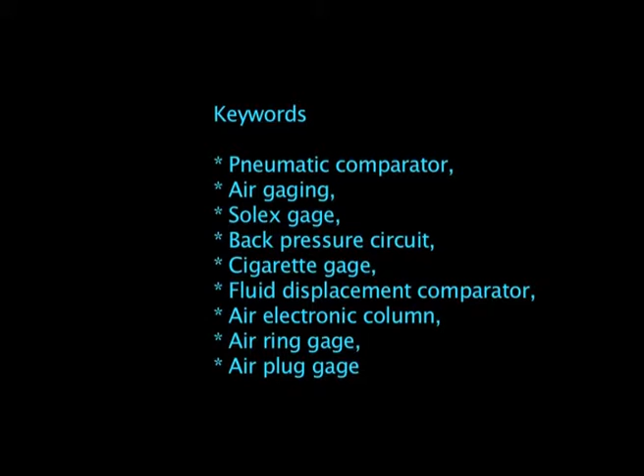In this lecture, we will be discussing pneumatic comparators, also known as air gauging equipment. We will study the need for pneumatic comparators, their working principle, the different kinds of circuits available, and the various components used in them. We will also study a commercially available gauge, the Solex gauge, and then move on to the important characteristics of pneumatic comparators. Then we will discuss their advantages and disadvantages, and finally see some applications of pneumatic comparators.

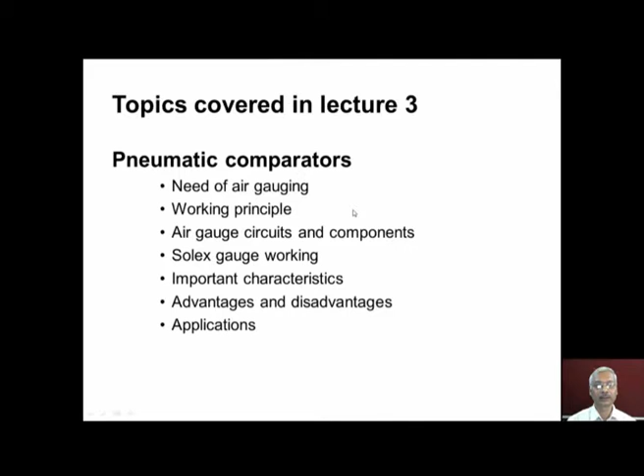Now let us study why there is a need for air gauging circuits or pneumatic comparators. Basically, they are non-contact type comparators, and because of this, they offer the advantages of improved workflow, increased productivity, and decreased downtime. They're ideal for measuring dimensions with tolerances smaller than 0.1 millimeter, and when gauging very tight tolerances, a resolution as small as 0.001 millimeter can be achieved.

Its non-contact characteristic makes air gauging particularly useful for checking very soft materials, highly polished surfaces, components with very thin walls, and other delicate materials. In case of delicate workpieces with highly polished surfaces, if we use contact type comparators, scratches may appear on the workpiece. So in such cases, non-contact type comparators are desired. Pneumatic comparators offer that particular benefit of not making any scratch on the workpiece surface.

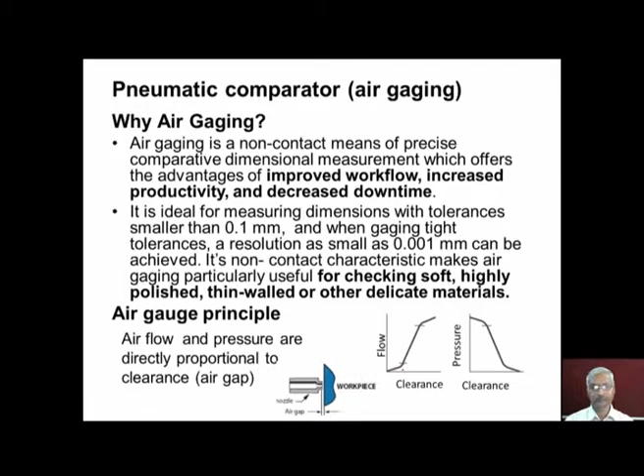Now let us study the different types of air gauging circuits available. The first one is the back pressure circuit. In this diagram, this is the workpiece, this is the nozzle, and this is the air gap or clearance between the workpiece and nozzle. We have the compressed air supply and a pressure regulator, so desired pressure can be set using this regulator, and there is a restrictor to restrict the flow of air.

When the gap between nozzle and workpiece is high, the airflow is easy. The air escapes easily into the atmosphere, and little pressure is developed in the system. Now, when this particular size increases, meaning the air gap reduces, the escapement of air is restricted, so a back pressure is developed in the circuit, which is indicated in this gauge. The development of back pressure is used to indicate the dimensional feature in this particular circuit.

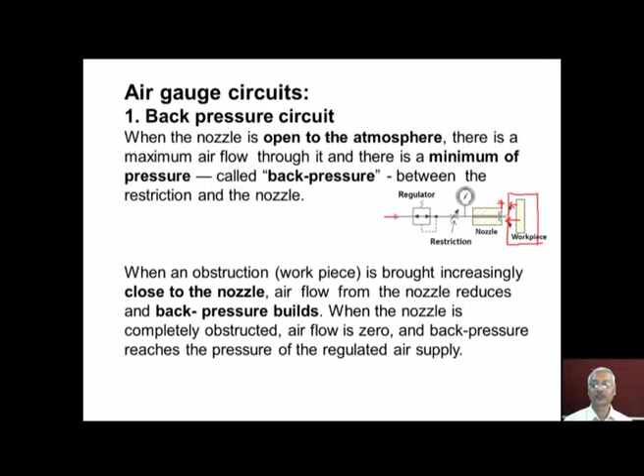Now there is another circuit in which airflow is measured. Again we have the air plug gauge wherein we have two jets. Say this is the workpiece, and this particular dimension, say D, is to be checked using this pneumatic comparator. Now we have the pressure regulator, and then there is an airflow meter. For example, a rotameter can be used in such applications. In the airflow meter, we have a float.

When the gap between the plug and the workpiece reduces, the airflow is restricted, meaning airflow reduces, so the float level reduces. When this gap increases, airflow will increase, air will escape freely, hence airflow increases, and the float level increases. There will be a scale fixed on the airflow meter, so by knowing the position of the float with respect to the scale, we come to know the size of the workpiece.

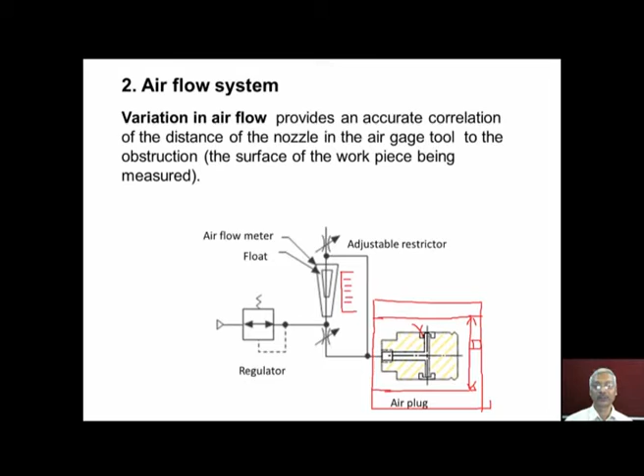Now let us study the various components used in pneumatic comparators. Essentially, the comparator requires a precision air regulator to provide a constant pressure air supply to the system, and then different kinds of toolings are needed like plugs, rings, and others, depending upon the work to be inspected. These toolings deliver a specific airflow or pressure to the surfaces being checked.

An amplifier is another essential component used in the pneumatic comparator, and this amplifier can be an air electronic column, or it could be a dial type meter, or it could be a flow meter tube, for example a rotameter. The amplifier provides a visual representation of the size being measured, permitting the user to take readings quickly and accurately.

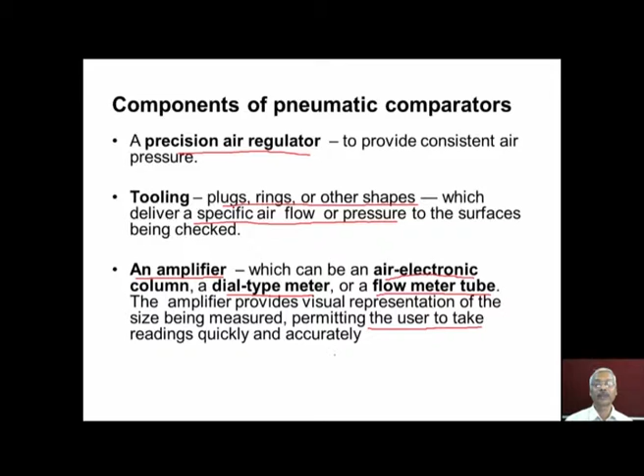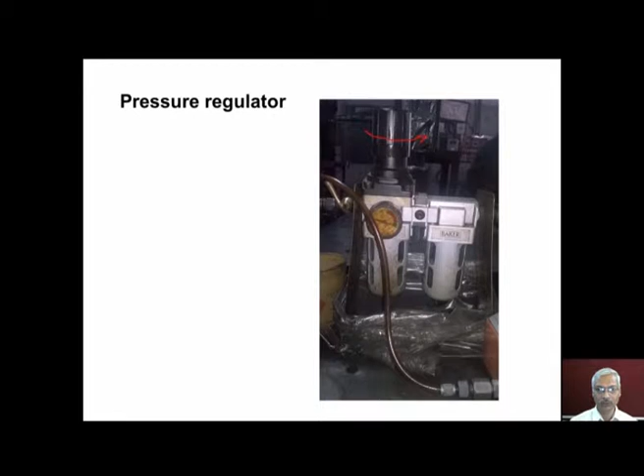Now in this photograph we can see a pressure regulator. This is the pressure regulator with filter to clean the supplied air, and this is the knob to adjust the air pressure. The level of pressure available in the system can be noted down by this pressure indicator.

Setting masters are used to calibrate the comparator. Depending upon the system, one or two masters, usually in the form of discs or rings, are used. Masters are typically made from alloy steel or tungsten carbide. So one set of setting masters are used to calibrate the system, one for setting the upper limit of the workpiece and another for setting the lower limit of the workpiece.

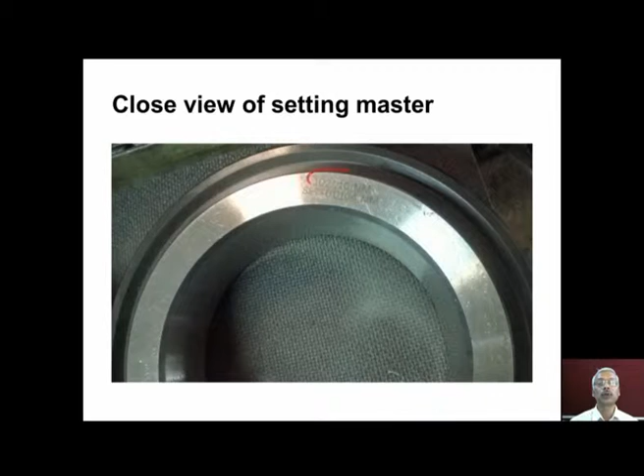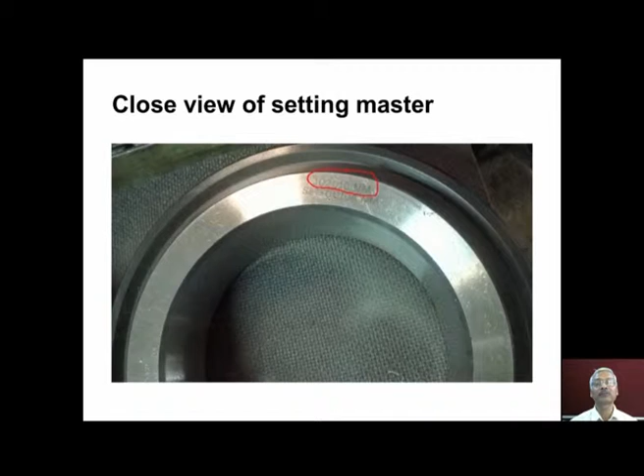This is a close view of a setting master. You can see here this is for a particular dimension, that is 102.01 millimeter. This is the desired size of the workpiece, or the basic size of the workpiece, and this particular setting master is used to set the upper limit, that is 102.01 plus 0.104 millimeter. This is the upper limit of the workpiece.

And then we have another setting master to set the lower limit of the workpiece. Again the basic size is 102.01 millimeter, and this particular setting master is used to set the lower limit, that is 102.01 minus 0.0094 millimeter, which is the lower limit of the workpiece.

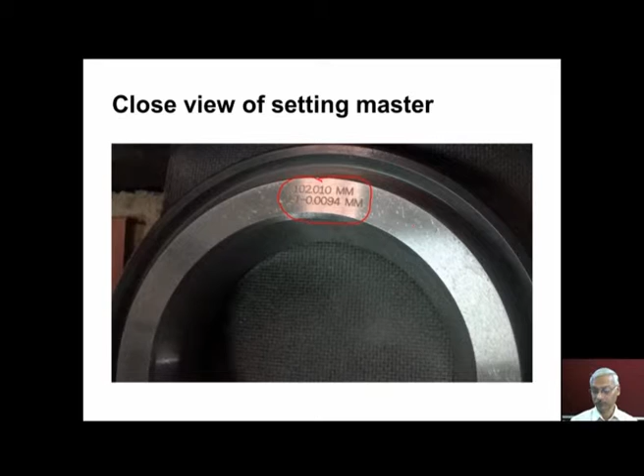Now when the gap between the work surface and the gauge reduces, airflow reduces and the float level will come down, indicating that the dimension being checked is small. Now when the gap increases, airflow is more, so the float level increases, which will indicate that the dimension of this particular feature is more.

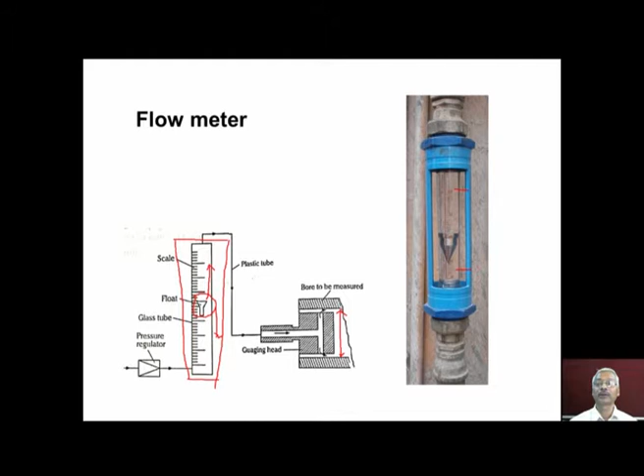So we can always set two limits, upper limit and lower limit, using the setting masters. When the float crosses the upper limit or lower limit, then the workpiece is rejected.

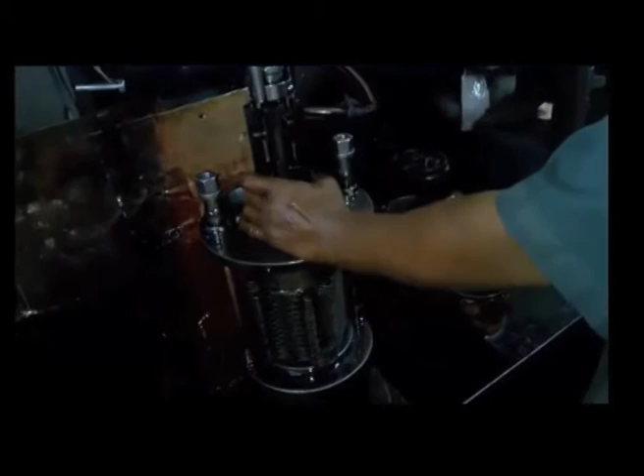Now let us see the working of an air gauge operation. Now we are observing the honing operation. The workpiece is clamped and the honing tool is inserted into the bore of the workpiece. The honing tool is adjusted.

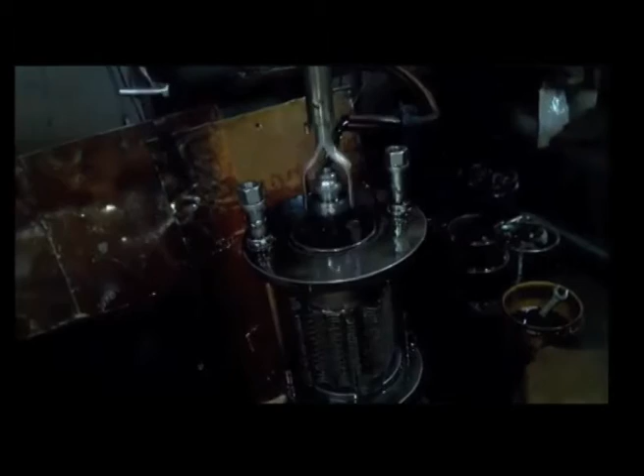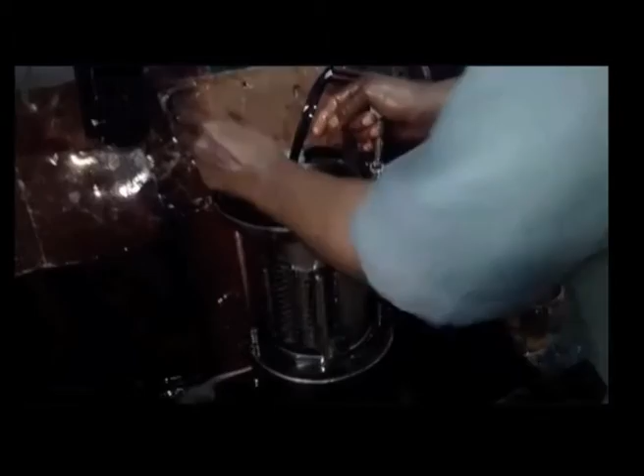Now the machine is started. The honing tool is reciprocating and rotating. The reciprocation rate and rotation rate can be adjusted depending upon the surface finish required. Now the operator is removing the workpiece. You can see the coolant flow, lubricant flow. Now the honed surface is visually inspected for the finish.

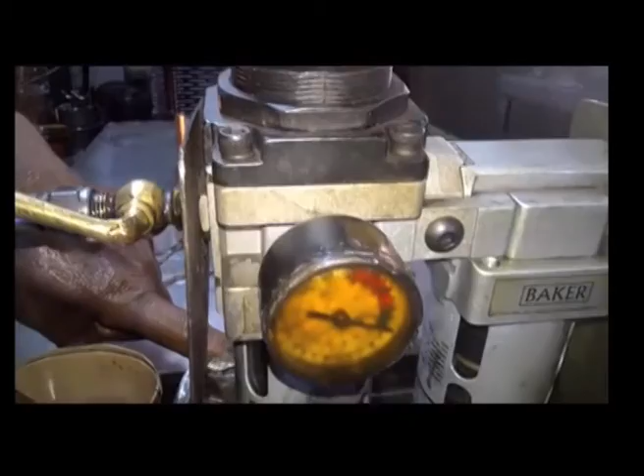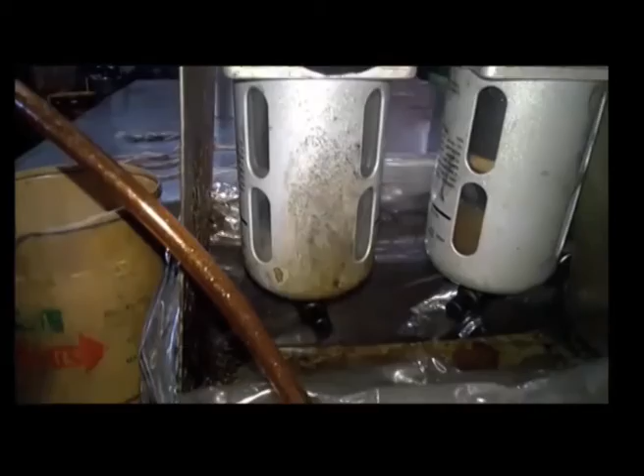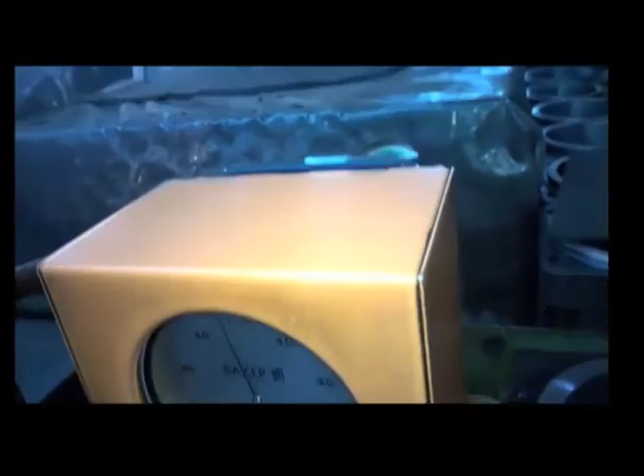Now we are observing the pressure regulator and filter. You can see the pressure indicator. Using this we can set the working pressure to the required pressure, like 3 bar, 4 bar or 5 bar. Now this green area indicates the pressure range in which the air gauge can be used.

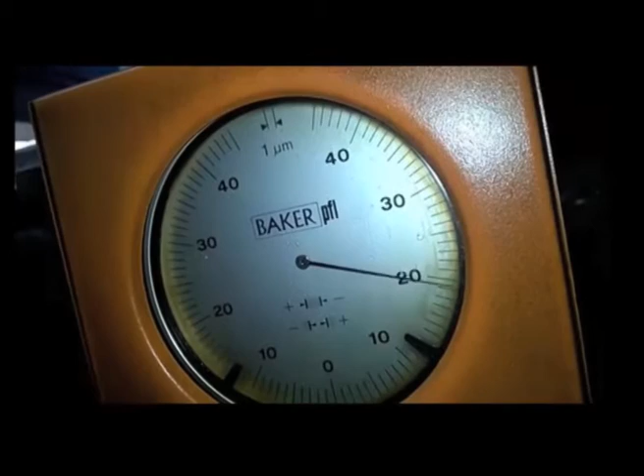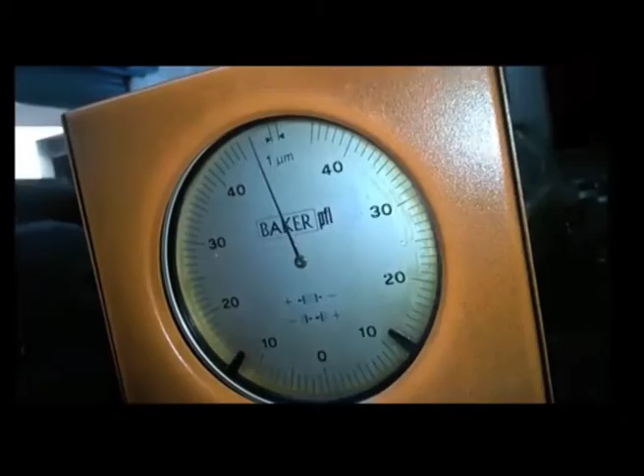Now we are observing an indicator which shows the size variation in terms of microns, so one small division is 1 micron. When we insert the plug gauge into the bore of the workpiece, depending upon the clearance between the workpiece surface and the plug gauge, the pointer will move and we can note down the reading.

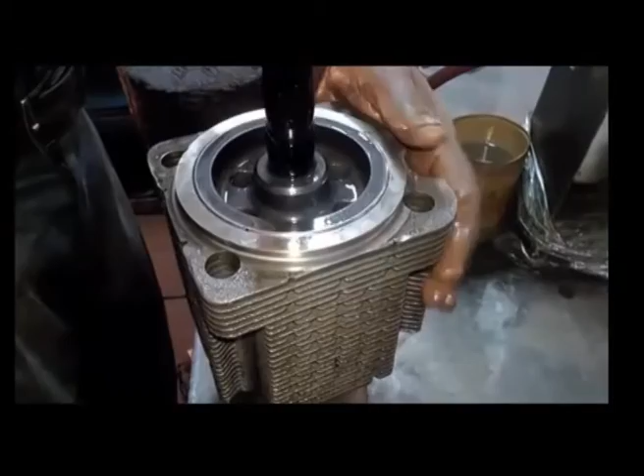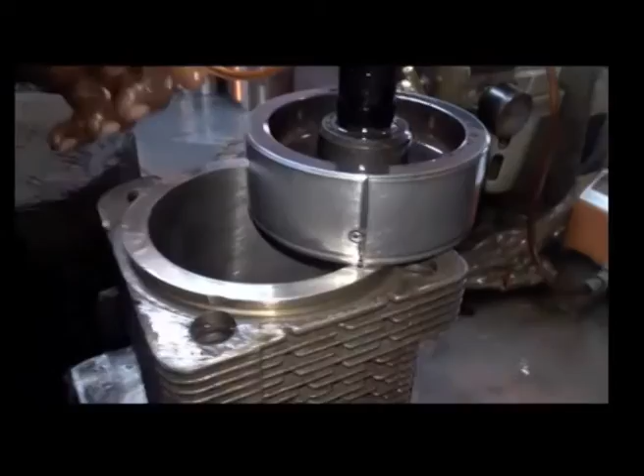Now we can observe the operator inserting the plug gauge into the bore, rotating the workpiece or gauge to check for roundness, and moving it vertically to check the cylindricity of the bore. Now we can observe the air plug gauge, the air jet through which air escapes. In the opposite direction we have air jets. Now you can see the air connection. Via the air gauge, the air will flow and it will enter into the air plug gauge.

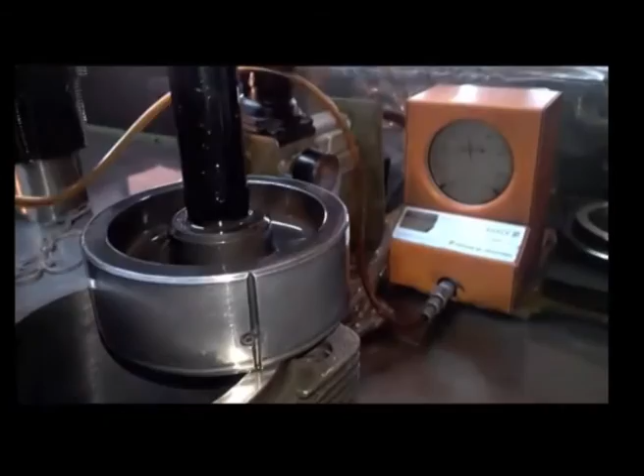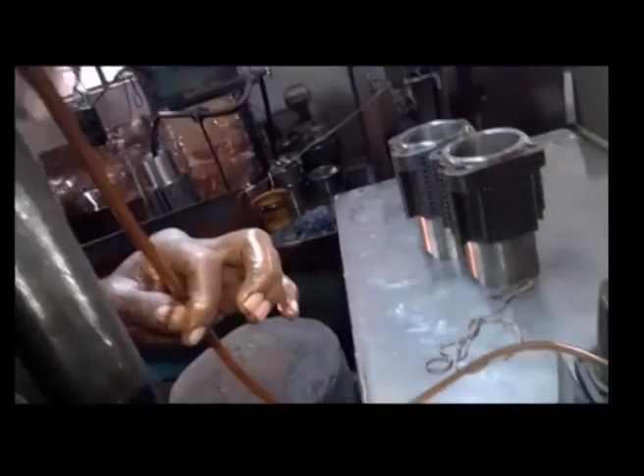Holes are provided in the air plug gauge to reduce the weight of the plug gauge.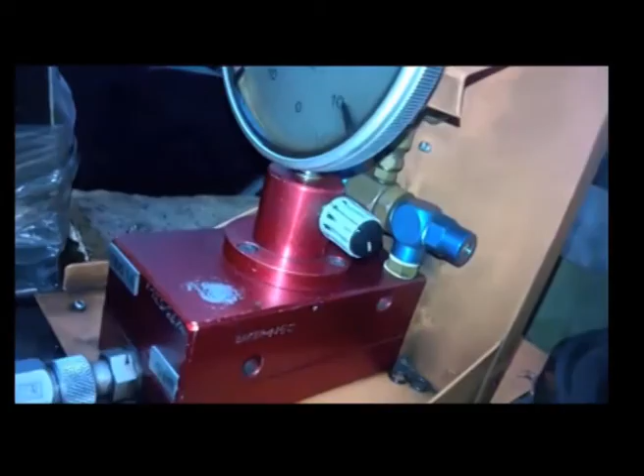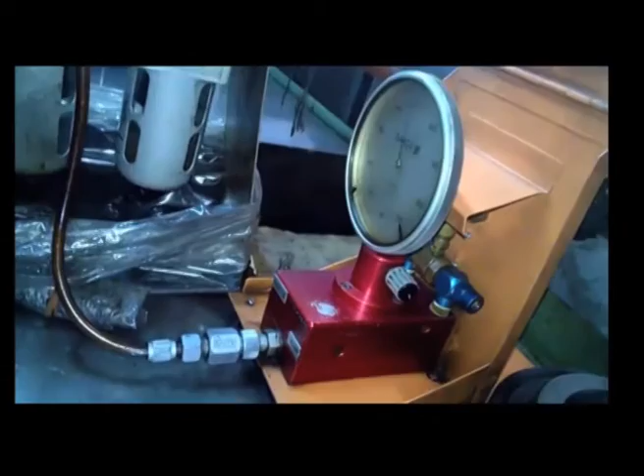You can set the air gauge. Initial calibration is done using the masters, and we can set the limiters. We can observe two limiters are there, which indicate the upper limit and lower limit of the bore size.

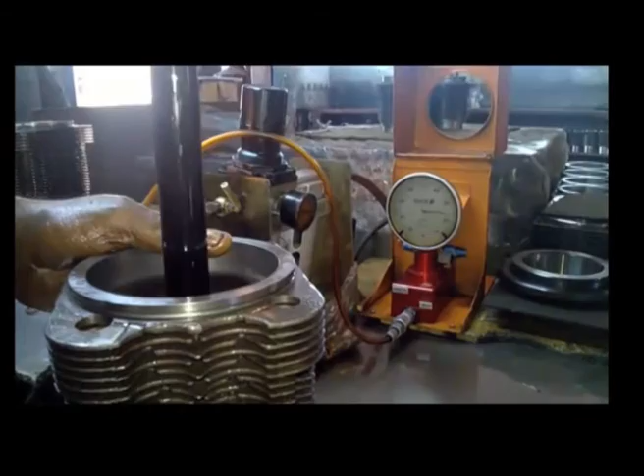The plug gauge is being inserted into the workpiece. The operator rotates the workpiece, then removes the plug gauge.

Now we can observe the two masters for initial calibration of the air gauge. This is plus 0.0104 millimeter from the desired size, and on the lower side minus 0.0094 millimeter.

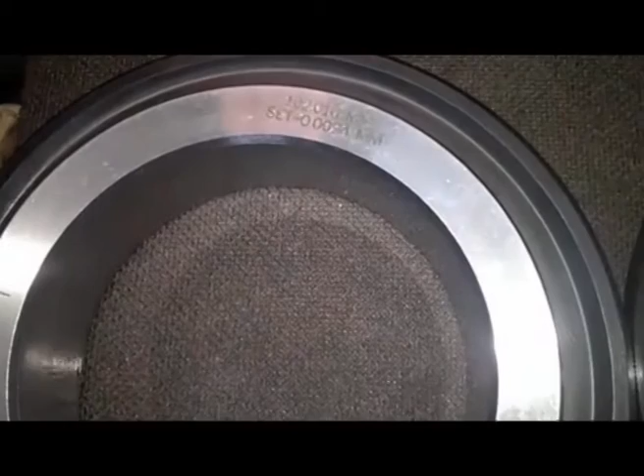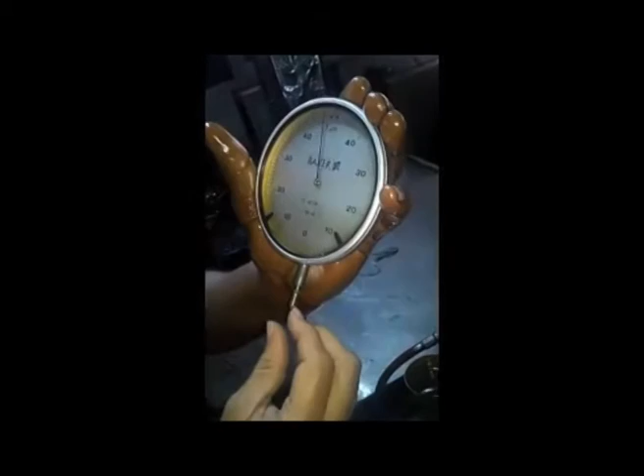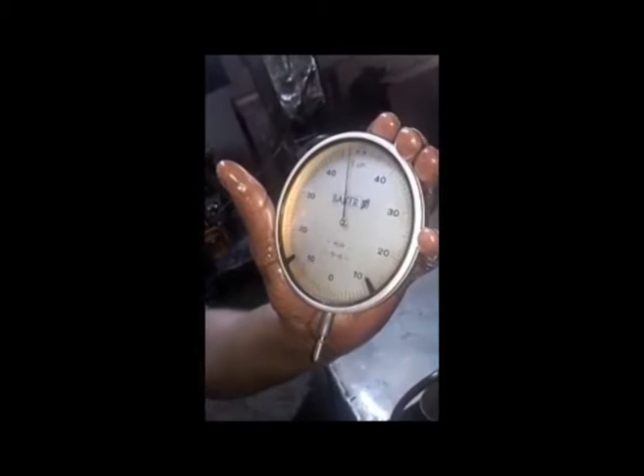Now we are observing the indicator removed from the air gauge setup. You can see the plunger. When the plunger is moved, the pointer rotates. We can see the range 0 to 50 microns on both sides, clockwise as well as anti-clockwise.

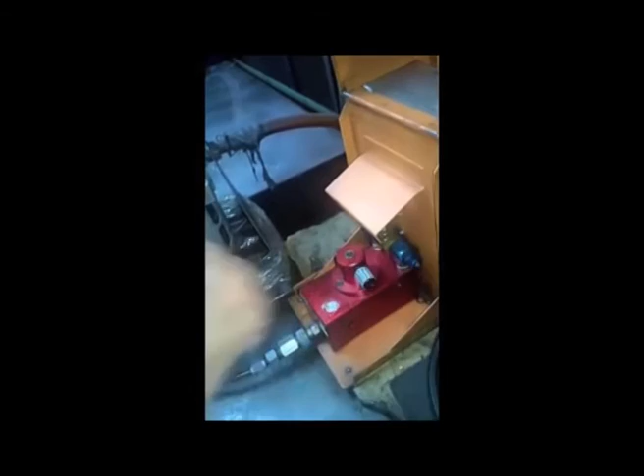This is the place where the indicator should be inserted. The operator is inserting the indicator, and then using masters we can set the indicator.

Now let us study a commercially available pneumatic comparator known as the Solex gauge, produced by Solex company. This company has developed a single and multiple dimensional measuring system, meaning a single dimension can be measured at a time, or multiple dimensions can be compared simultaneously. These highly versatile systems are used in many industries such as automotive, manufacturing, pharmaceuticals and food industries. They work on the principle of pressure difference generated by the airflow.

Back pressure is measured, which indicates the size of the workpiece. The air is supplied at constant pressure through the orifice, and the air escapes in the form of jets through the restricted space, which exerts a back pressure in the system. The variation in back pressure is then used to find the dimensions of the components.

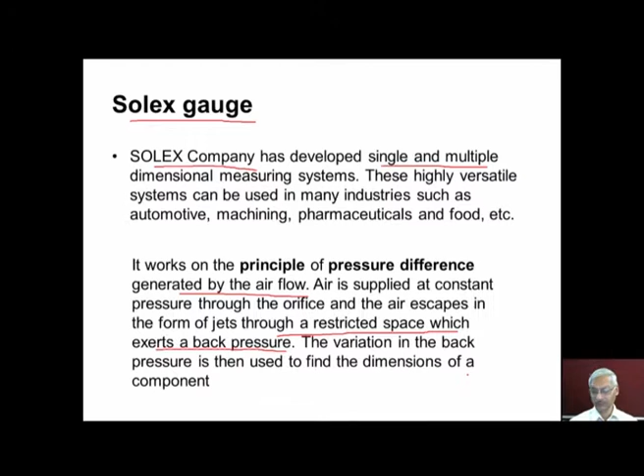Now let us study how the Solex gauge works. Compressed air is supplied to the system. The pressure of the air will be equal to water head H. We have a tank filled with water to a certain level, and H indicates the air pressure. This value of pressure can be varied by adjusting the depth of the dip tube in the water tank, so we can adjust the depth and then adjust the pressure in the system.

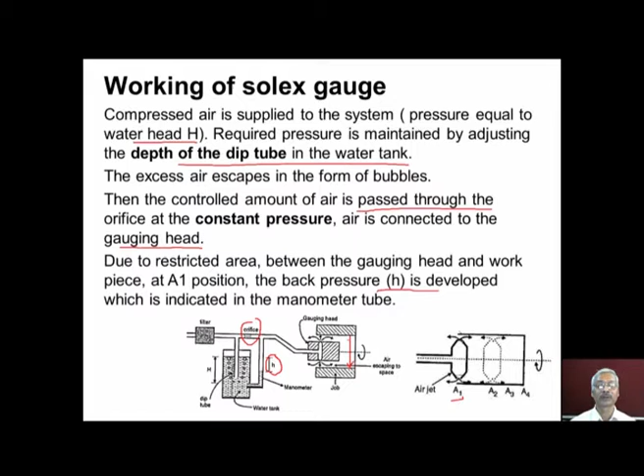Due to the restricted area between the gauging head and the workpiece, say for example at position A1, the back pressure h is developed. Because of this restriction, the back pressure h is developed, which indicates the size of the dimensional feature, for example the diameter, the hole diameter in this case.

We can also determine the roundness and cylindricity of the job using this system. To determine roundness, the workpiece is rotated along the jet axis. If there is no variation in pressure reading h when the job is rotated, it indicates that the workpiece is perfectly round at this particular position.

This procedure is repeated at different positions along the length of the hole, A2, A3, A4, etc., and we note down the roundness at different positions. Similarly, we can measure the cylindricity of the workpiece. The diameter is measured at various positions A1, A2, A3, A4, etc., which gives information about the cylindricity.

For example, we have a workpiece and its axis, and then we are using the gauging head to check the diameter.

We insert the gauge here, and the reading h at position A1 is noted down. Then the gauge is moved and the reading is taken at position A2, and then at A3, and like this at different positions the reading h is taken.

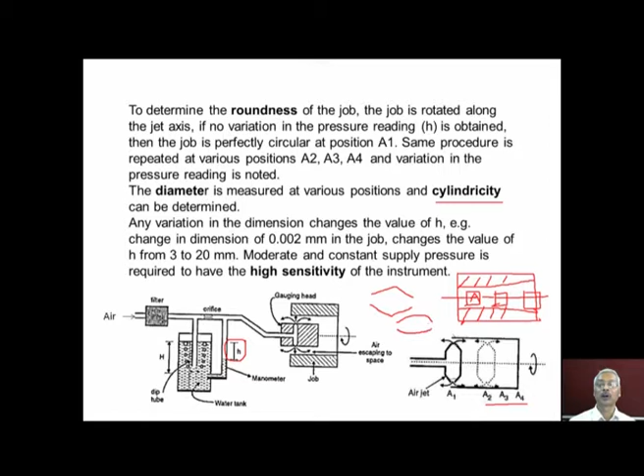If there is any variation, that will indicate whether the hole or the workpiece is tapered or double tapered, or the bore is barrel shaped or bell mouth shaped. Such cylindrical features we can check using these gauges.

Now let us study why two jets are used in this particular gauging head. What happens if we use a single jet? Observe here, this is the workpiece part being inspected, and this is the gauging head, also known as the spindle, with single jet.

When the spindle is rotated, keeping the job fixed, this clearance varies from angular position to angular position. Because of this, the float will move up and down, indicating that the diameter is varying from angular position to angular position. Even though the inside bore is round, because of the use of a single jet, the float moves up and down, giving false information about the roundness of this bore.

Now what happens if we use a double jet in opposite phases? When we rotate the spindle with two opposite jets, the sum A plus B, this clearance and that clearance, remains constant at any angular position. So the float remains constant. When the spindle is rotated, it will not move up and down because the summation A plus B remains constant, indicating that the hole is round. This is the advantage of using dual opposite jets: it gives correct information about the roundness of bores.

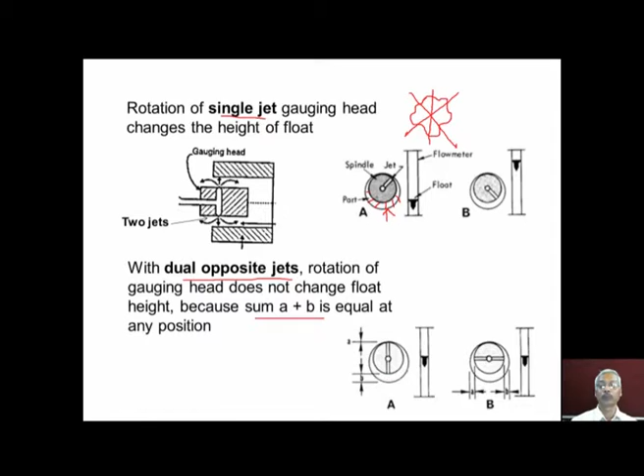Now let us study the important characteristics of air gauging. Air gauging operators are available with very high magnifications or amplifications, as high as 10,000 times. It can be used to measure parameters like diameters, length of the component, squareness, parallelism, concentricity, and taper measurement is possible. Center distance between two holes can also be checked using air gauging.

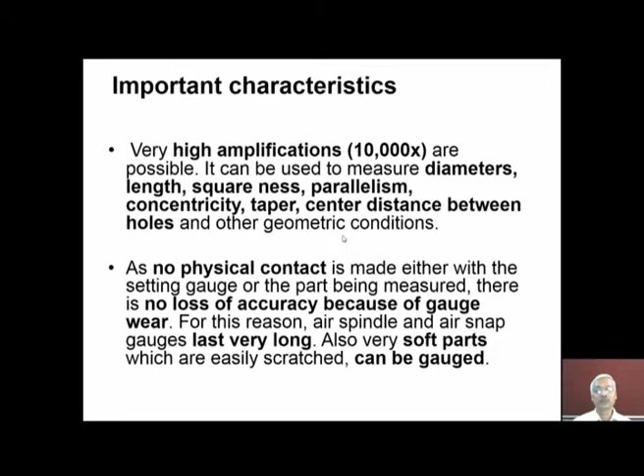As there is no physical contact between the gauging head and the work part, accuracy is not lost because of gauge wear. For this reason, air spindle and air snap gauges last very long. Also, very soft parts can be gauged without any chance of getting scratched.

The internal dimensions of the components can be readily measured, not only with respect to the tolerance limits, but also with respect to the geometric form. Geometrical aspects such as taper, straightness, camber and bell mouth can be easily checked.

These air gauges are independent of operator skill; any unskilled operator can easily use them for checking components. High pressure air gauging can be done with cleansing of the parts, which helps eliminate errors due to dirt and foreign matter.

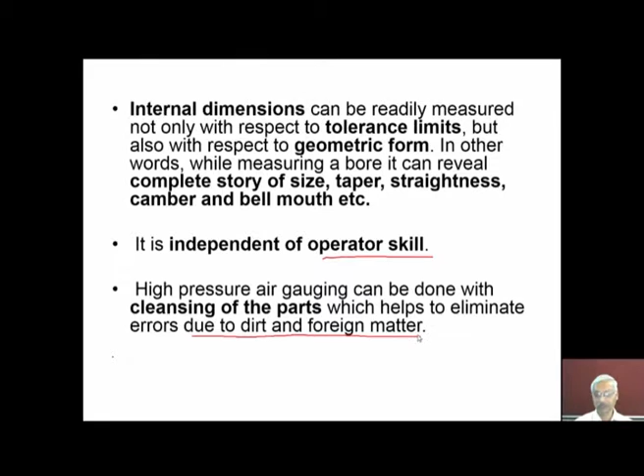Gauging pressures can be kept sufficiently low, as low as 3 or 4 bar, to prevent part deflection. In general, high pressure gauges are suitable for parts with relatively large tolerances, while low pressure air gauges are preferable for highly precise work.

Dimensional variations throughout the length of a shaft or cylinder bore can be explored for out-of-roundness, taperness, concentricity and similar conditions. That means if we have a cylinder bore like this, we can insert the air gauge into the bore, and check it throughout its length for circularity errors, taperness, concentricity, etc.

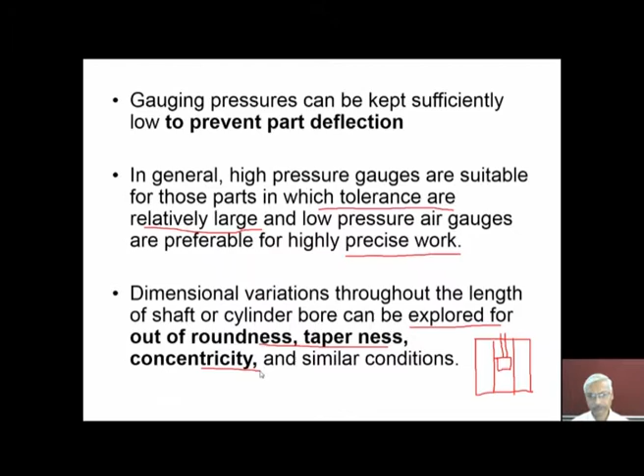Not only does it measure the actual size, but it can also be used for salvaging oversized workpieces for rework, or to sort them out for selective assembly. That is, pneumatic gauging is very suitable for variable inspection, for measurement of size, and also for attribute inspection to segregate workpieces into acceptable and unacceptable ones.

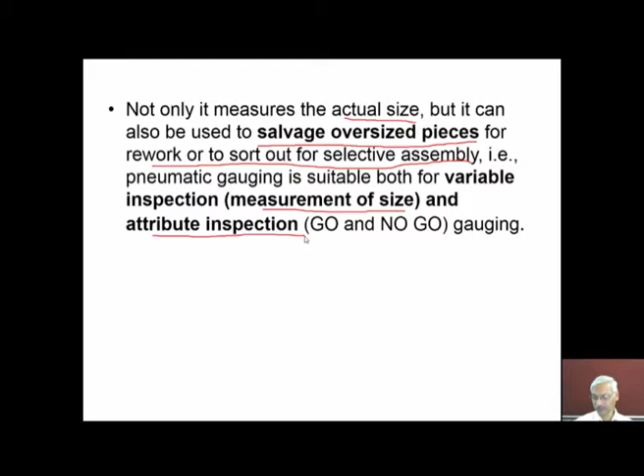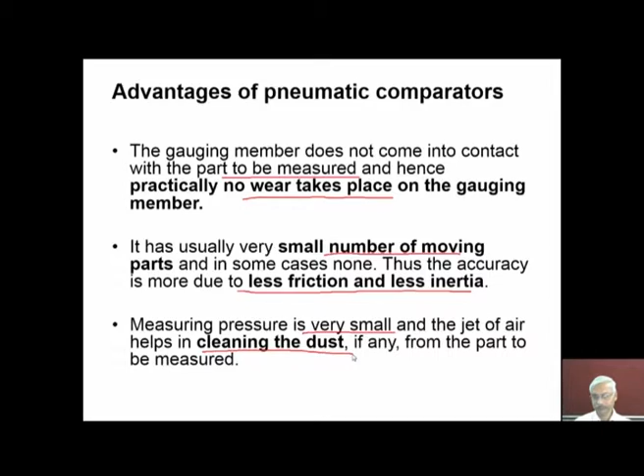It usually has a very small number of moving parts, so accuracy is greater due to less friction and less inertia. Measuring pressure is very small, as low as 3 to 4 bar, and the jet of air helps clean the work surfaces. We can also have very high magnification, as high as 10,000 times. The indicating instrument can be remote from the measuring unit.

These air gauges are very suitable for measuring the diameter of holes where the diameter is very small compared with the length. For example, deep holes like gun barrels can be easily checked with these gauges. It is possibly the best method for detecting ovality and taperness of circular bores, such as taperness, bell mouth shape, or barrel shape in a hole.

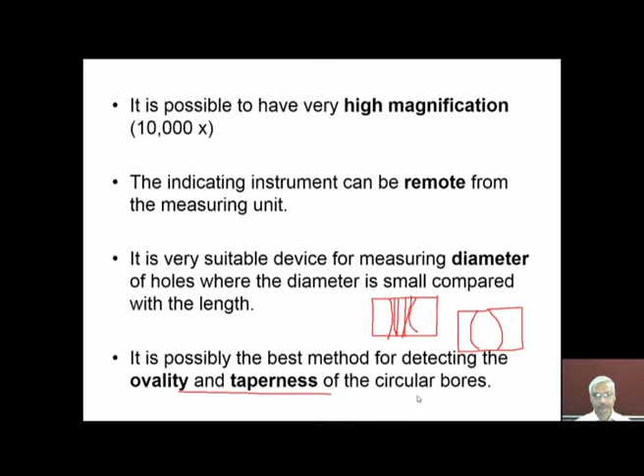A row of multiple column amplifiers can be scanned in one glance. Many column amplifiers are available, and we can observe multiple readings or multiple features of the workpiece at a time, so that the workpieces can be checked at a faster rate.

These amplifiers provide a visual representation of the checked feature, permitting the operator to take readings quickly and accurately. Either back pressure systems or flow systems using flow meter tubes can be used for visual representation, and parallel stacking of columns or flow meter tubes puts all readouts into the same vertical relationship, making comparison much simpler.

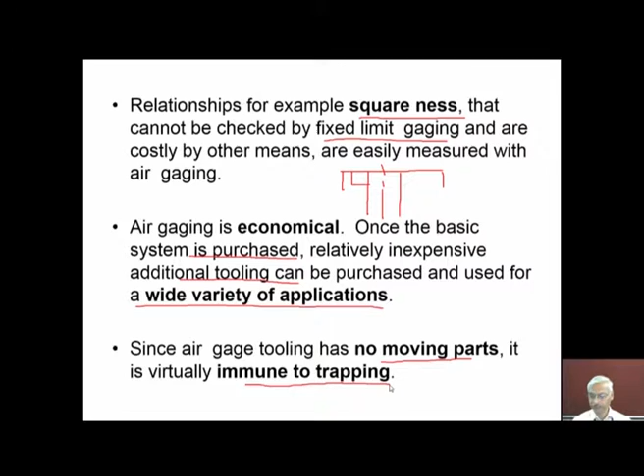Once the basic system is purchased, relatively inexpensive additional tooling such as gauging heads can be purchased and used for a wide variety of applications. Since air gauge tooling has fewer moving parts, and in most cases no moving parts, it is virtually immune to trapping - meaning the gauge will not get trapped in the work part.

Now let us study the disadvantages of air gauging systems. It requires very elaborate auxiliary equipment such as pressure gauges, pressure regulators, and air filters for filtering dust particles. So it requires elaborate auxiliary equipment.

The scale is not generally uniform. When the indicating device is a glass tube, for example a manometer, very high magnification is necessary to avoid meniscus errors. The apparatus is not easily portable.

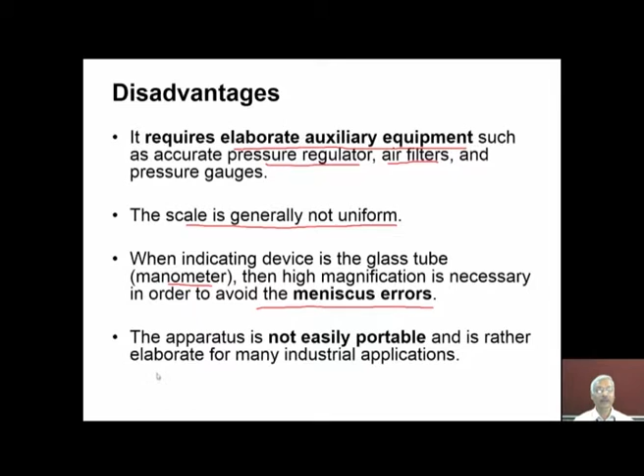Since it is bulky, it should be placed at one place, and is rather elaborate for many industrial applications.

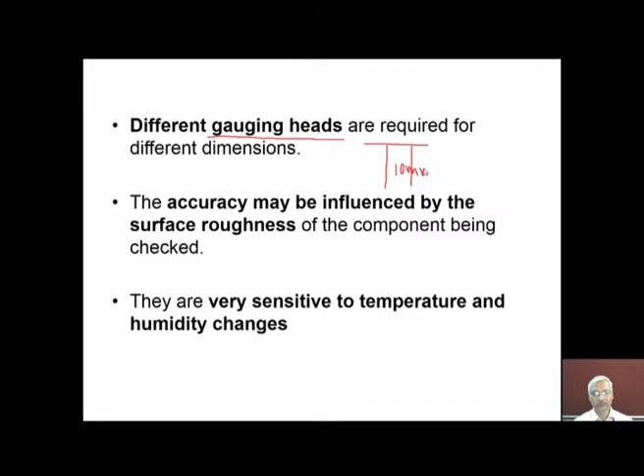Different gauging heads are required for different dimensions. For example, when the bore size changes, we have to have a different set of gauging heads - for a 10 mm bore size we need one gauging head, and for a 12 mm bore size we need another. So as the dimension changes, we need to purchase the necessary gauging heads.

The accuracy may be influenced by the surface roughness of the component being checked - the surface roughness will also affect the reading. They are very sensitive to temperature and humidity changes, so sometimes it becomes necessary to control the working environment where air gauges are used.

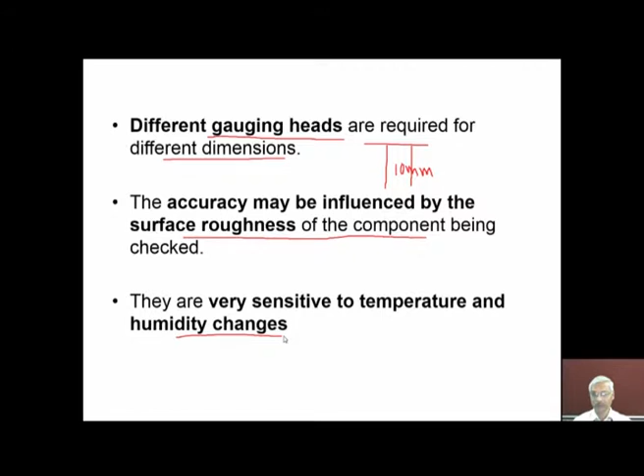Now let us study the various applications of air gauging. These air gauges are used for dimensional control of aerosol spray nozzles, and they are used to control gun barrels. They are also used to control the dimensions of knee prosthesis.

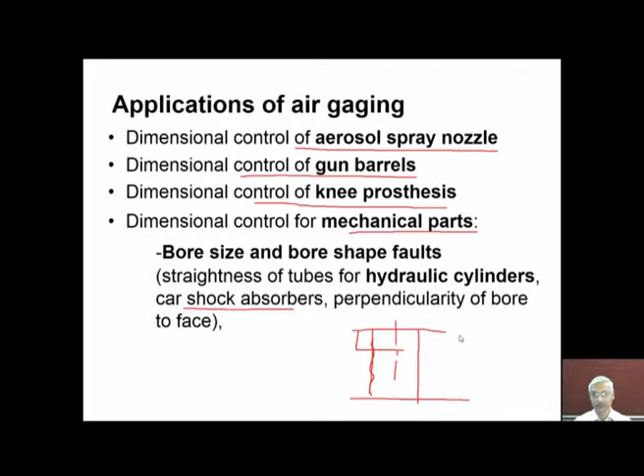They are very much used for dimensional control of mechanical parts, such as bore size and bore shape faults - that is, straightness of tubes for hydraulic cylinders. For example, with a hydraulic cylinder bore, whether the bore is straight or perpendicular with respect to the face can be checked. They are also used to check car shock absorbers and perpendicularity of the bore to face.

Dimensional control of mechanical parts such as engine cylinder linings can also be checked. These engine cylinder internal surfaces require a very good and fine surface, with no scratches appearing on the internal surface of the liners. So since the air gauge is non-contact type, they are very much used to inspect cylinder lining internal surfaces.

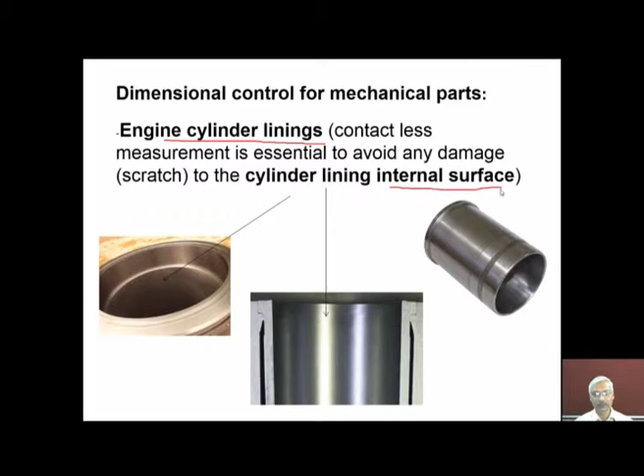These air gauges are used for inspection of castings, injection molded or welded parts, tanks, pipings, and hydraulic nozzles, and brake system components are checked using air gauges.

They are also used to check spark plugs, gas appliance valves, solenoid valves, tire valves, stationary and rotating joints, etc. Testing of carburetor and gas appliance jets, injectors, and injection molding nozzles are checked by using air gauges. Burners and nozzles are checked. Shock absorber nozzles are also checked by air gauges.

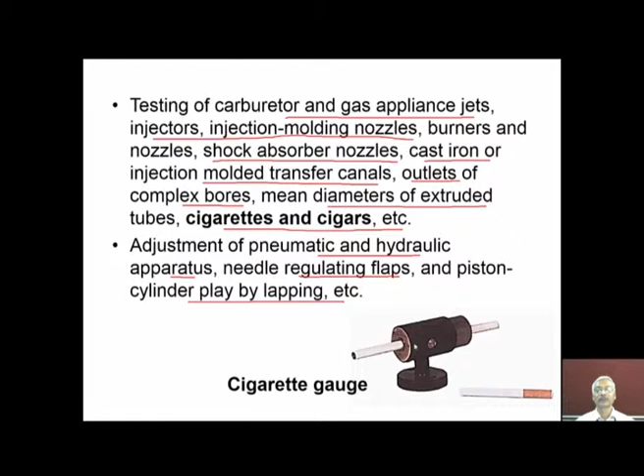So in this picture we can see a cigarette gauge. The cigarette is placed here, and it is checked for its dimensions. Now you can see some of the applications.

What is the height of the component can be easily checked by using air gauges, and we can check whether the plate is straight or not, whether there is any curvature in the surface. Such things can be checked.

And then what is the depth of bore, the depth of blind hole in the workpiece, can be easily checked.

Tubing straightness can be checked by inserting the gauging head into the tube, and short bore squareness can be checked, outside diameters can be easily checked, squareness of the bore width to the face can be checked, taper in the component can be checked, the flatness, screw width, inside diameter, outside diameter, such things can be easily checked using air gauges.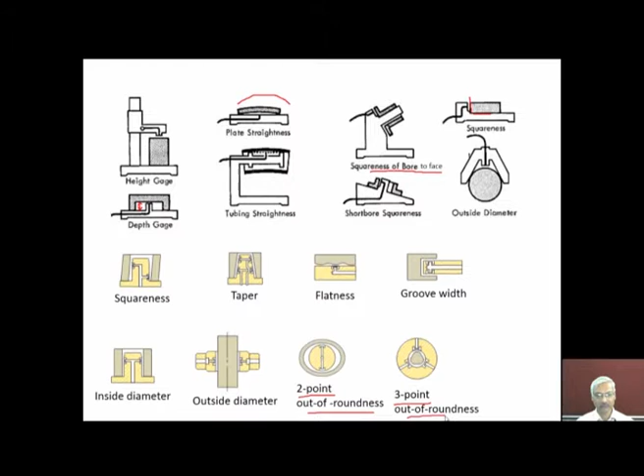Now you can see here the measurement of groove width. So this, what the groove width is, can be easily checked using air gauges.

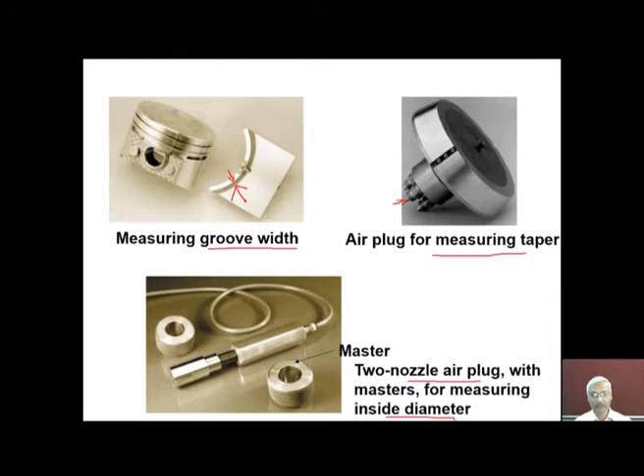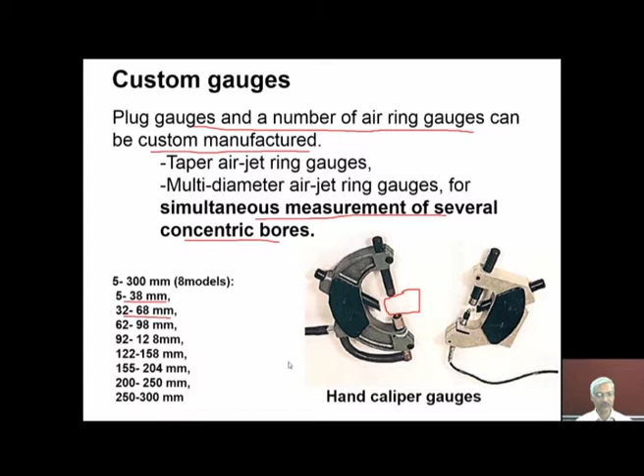So we can see here hand caliper gauges, adjustable hand caliper gauges. We can keep the workpiece here and check whether the size is okay or not. These are adjustable hand caliper gauges, available in different sizes, 5 to 38 millimeters, 32 to 68. So with different ranges, these can be manufactured.

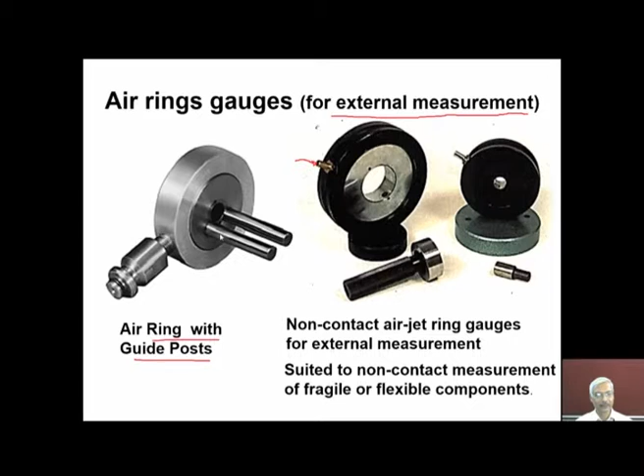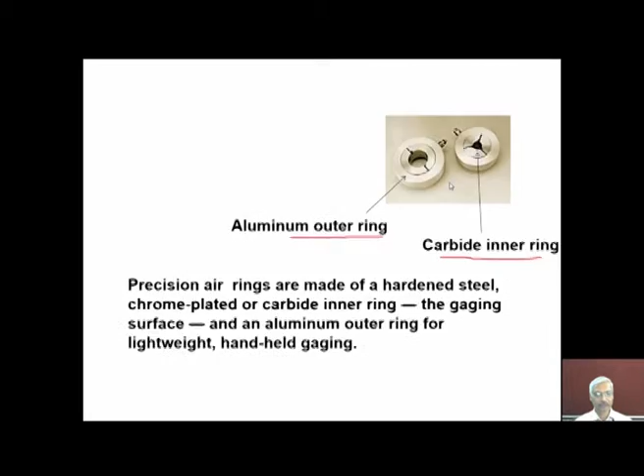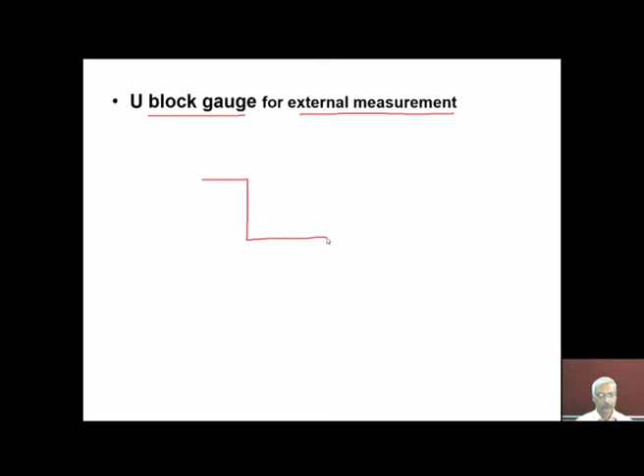Now for external feature measurement, U-block gauges are available. So they will be like this. This is the body of the U-block gauge. And this is the table on which the workpiece can be mounted. And here we have jets, where air will escape, and air connection can be made here.

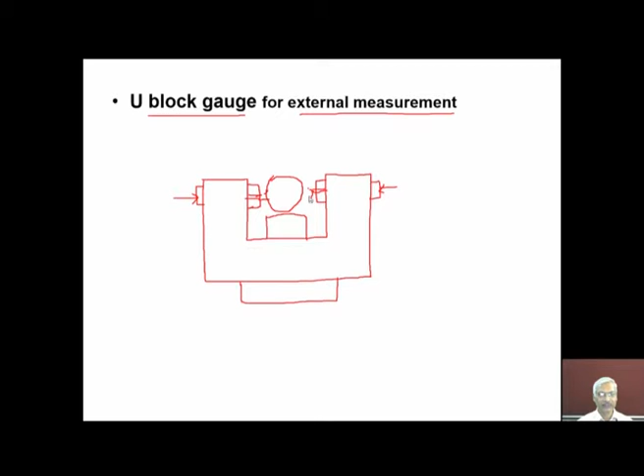And here we can place the workpiece. Depending upon the clearance, we can get the reading from the float position, or if we are using a back pressure type, the pressure gauge will indicate what is the size.

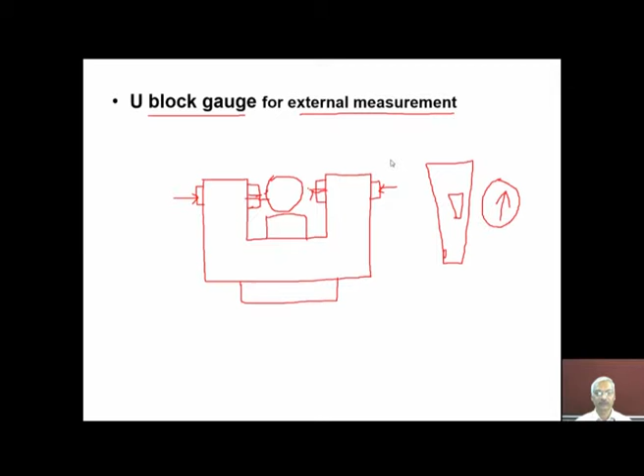So this is a U block gauge, an air gauge for external feature measurement. Now you can see some air plug gauges for internal measurement here. These plug gauges are inserted into the bore, and air escapes here.

Depending upon the clearance, we can get the reading. So air plug gauges with different sizes are available, and we can have air plug gauges in the range of 3 to 160 millimeters. Even bigger size gauges are available.

We can see a special air plug gauge, a split type air plug gauge, wherein the weight of the plug gauge can be reduced. Accuracy between 25 to 200 micrometers is possible with such air plug gauges.

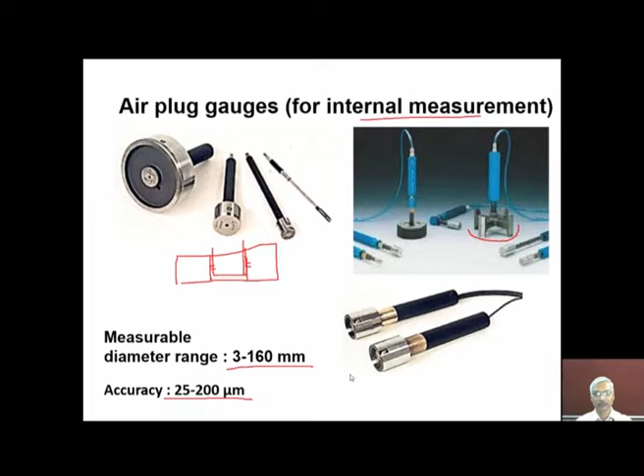Now let us study about another type of comparator, known as the fluid displacement comparator. We can see its construction in this diagram. There is a chamber in which low viscosity liquid is filled. One end of the fluid chamber has a diaphragm to which a plunger is fixed. At the other end of the fluid chamber, we have a fine bore capillary tube.

When the diaphragm deflects, the liquid rises in the capillary tube, and there is a scale to note down the level of liquid in the capillary tube. We can also have two pointers to indicate the upper limit and lower limit of the workpiece.

Now, during usage of the fluid displacement comparator, we have to insert the workpiece between the table and the plunger. Depending upon the actual size of the workpiece, whether it is greater than or lower than the desired size, this plunger will move up and down.

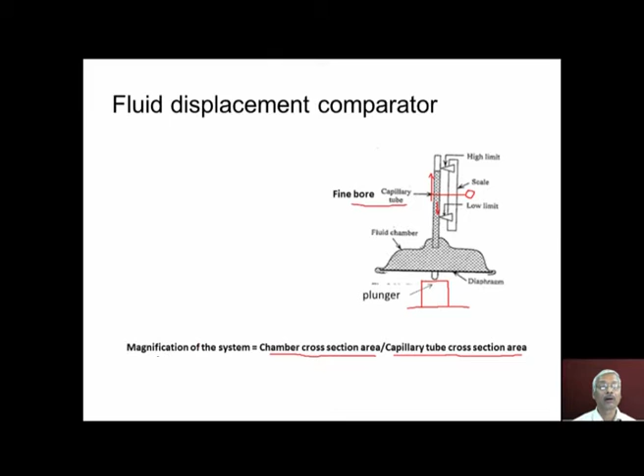Now, the magnification of such a system is the chamber cross-sectional area divided by the capillary tube cross-sectional area. By adjusting these values, we can construct a fluid displacement comparator of the desired magnification.

Now let us study the various applications of the fluid displacement comparator. These comparators are used in mass production for quick inspection. The operators will insert the workpieces between the plunger and table, observe the level of liquid in the capillary tube, and then decide whether the workpiece is acceptable or not.

It can be used as a laboratory standard from which working gauges or inspection gauges can be set. These fluid displacement comparators are used for inspecting newly purchased gauges. They can also be used as working gauges to prevent workpiece spoilage during manufacturing, to maintain required tolerances. These can be used in selective assembly of parts, where parts are graded into three or more groups depending upon their tolerance.

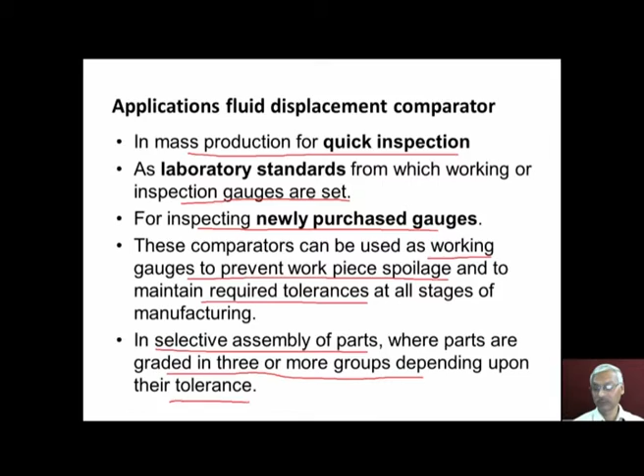Now let us conclude module 10, lecture 3. In this lecture, we discussed the different aspects of pneumatic comparators. We discussed the need for air gauging systems and their working principle.

We also discussed the different circuits used in air gauges, such as the back pressure circuit or the fluid flow circuit, the various components used in air gauging systems such as amplifiers, different types of gauges and different types of amplifying systems, and a commercially available Solex gauge system.

We discussed the various important characteristics of air gauging systems, their advantages and disadvantages, and their various applications in different fields like manufacturing, and how they can be used to check toolings. We also discussed air plug and ring gauges.